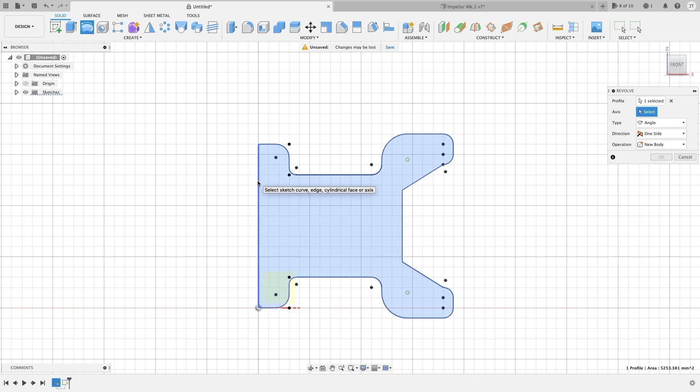And as you can see right away, it has extruded it in a circular manner around the center point axis that we have designated. Now what's neat about this is if you don't want to do a complete 360 degree circle or profile, you can adjust it to whatever angle you want. So if you wanted to go to a 90 degree or a 180 degree or a 270 or 360 degree angle, you could specify it that way.

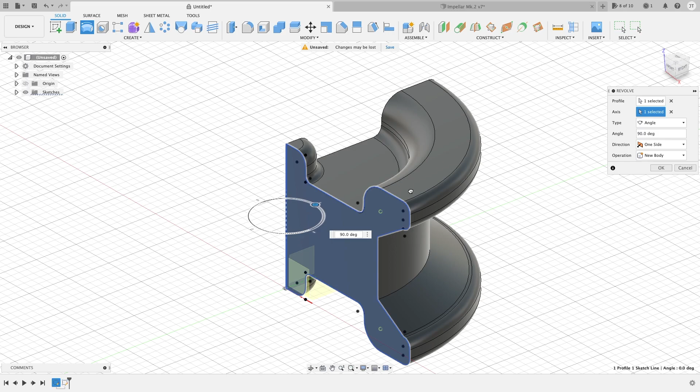There's also another direction that you could do. You can go to your direction, go to symmetric. You could extrude it in both directions equal to the other side. And that's kind of a neat little way to go about doing that. You can also make a new body, join. You can do a full 360 degree. So that's a very basic explanation of that.

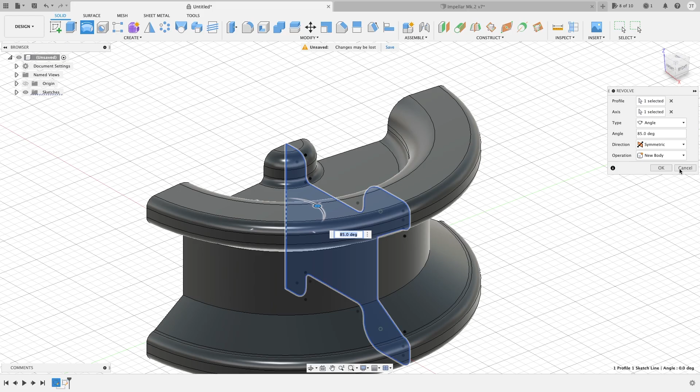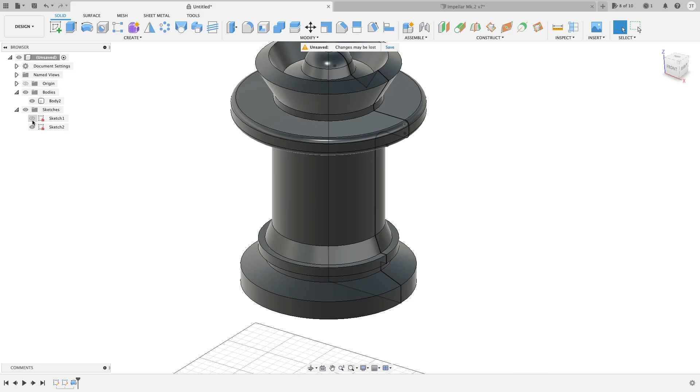Why would you use this? It would be for things like, let's say you wanted to make a chess piece. This is a very terrible chess piece example because I had nothing to go off of, just kind of winged it. But you could in fact make a chess piece that looks way better than mine.

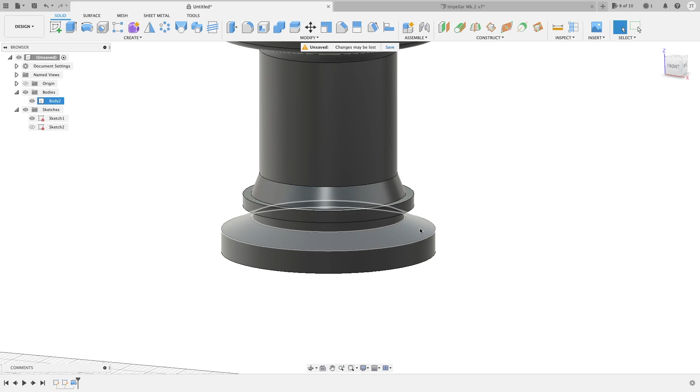But it cuts down a lot of time, saying that if you wanted to make one of these and you didn't know about a revolve, you would basically have to create a circle on your sketch, extrude it, make another circle, put it at an angle, extrude it, da da da da. But revolves cut down a lot of time in that manner.

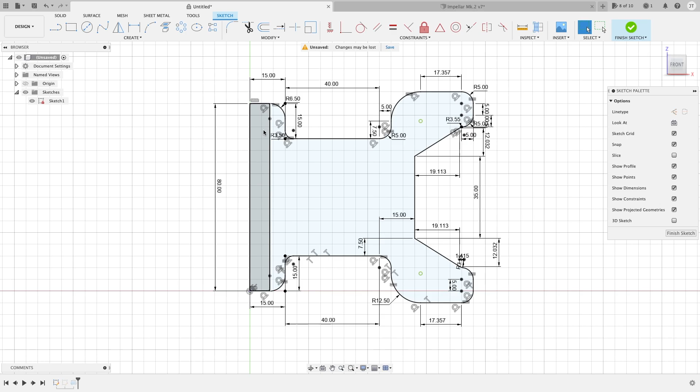So let's move on to something I'm going to do here. We're going to add the sketch. Excuse my terrible constraining. I did this really quickly. I just wanted to constrain it really quick, so it's not the prettiest nor the correct way, so don't do what I did.

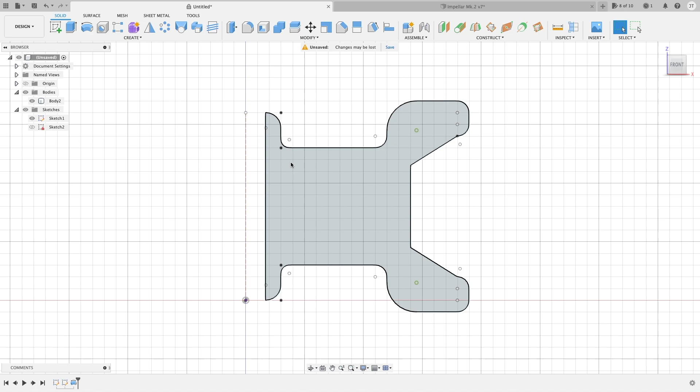So what we're going to do here is highlight our axis point here as a construction line. And as you can see, this is where we're going to revolve our 2D profile around. And you can see that there's a gap in between here. So when I go over to my revolve here, I'll select our profile, we're going to go to our axis, which is here, and boom.

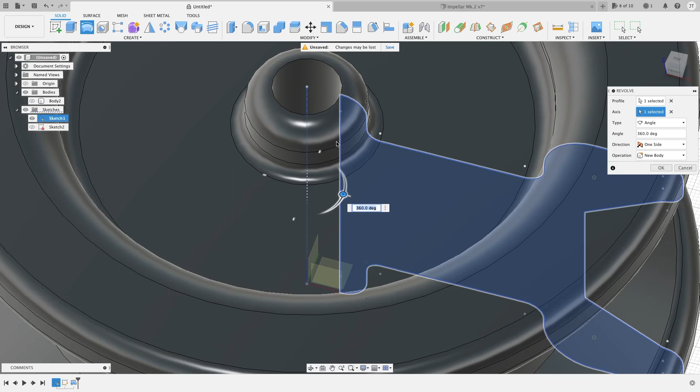Now as you can see with this one, there is a hole created. There is a hole created because our 2D profile didn't meet on the axis point, so it is not a solid piece. There is a gap left in it, so it creates a hole. This saves you from having to create a hole later on, and just kind of cuts down on work you'd have to do later on.

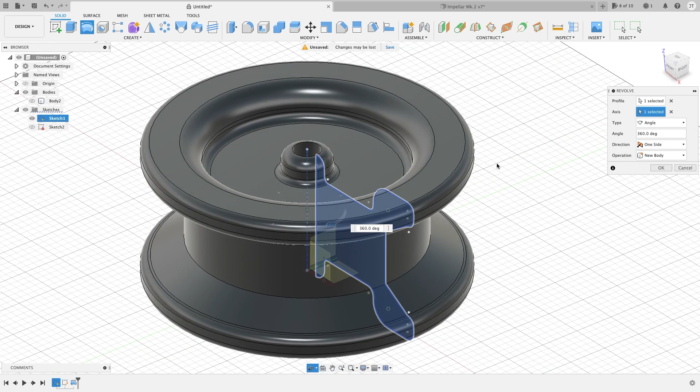And as we have said already, you can put it to whatever angle you want to, and that kind of really sums up our revolve tutorial. It's very basic and very useful for creating profiles in a circular manner.